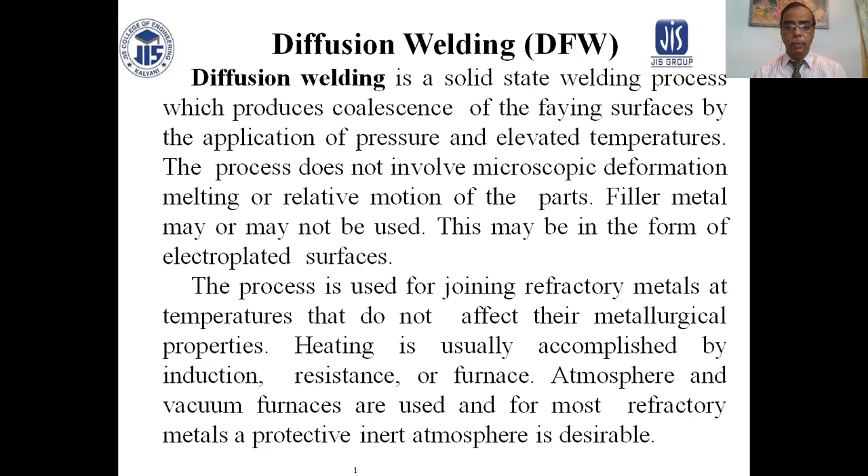Successful welds have been made on refractory metals at temperatures slightly over half the normal melting temperature of the metal. To accomplish this type of joining, extremely close tolerance joint preparation is required, and a vacuum or inert atmosphere is used. The process is used quite extensively for joining dissimilar metals.

The process is considered diffusion brazing when a layer of filler material is placed between the faying surfaces of the parts being joined. These processes are used primarily by the aircraft and aerospace industries.

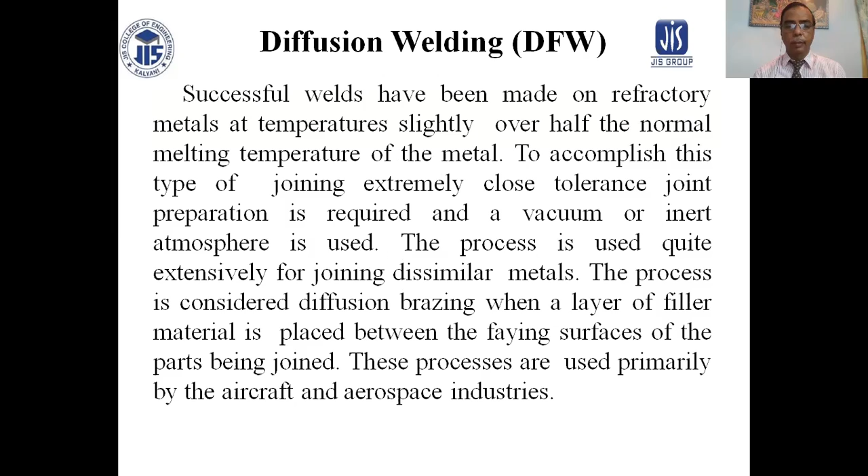Definition, schematic figure, working principles, applications, titanium diffusion welding, nickel diffusion welding, advantages, limitations.

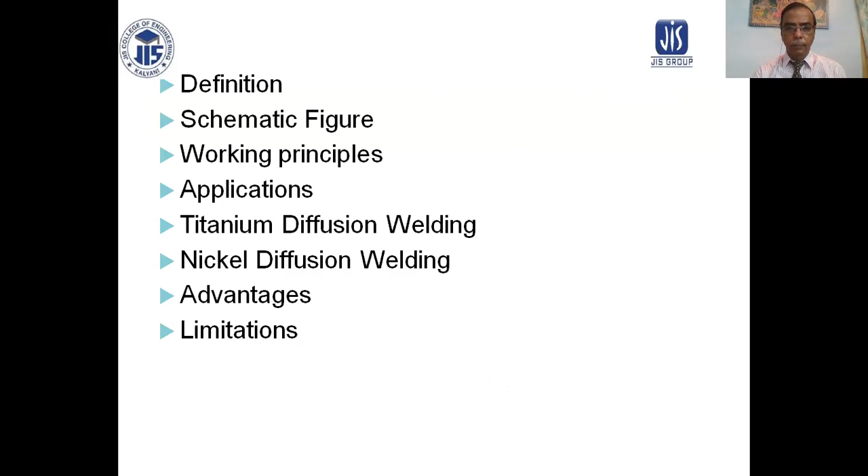Definition of diffusion welding: a solid-state welding process that produces coalescence of the faying surfaces by the application of pressure at elevated temperature. The process does not involve macroscopic deformation or relative motion of the workpiece. The solid filler metal may or may not be inserted between the faying surfaces.

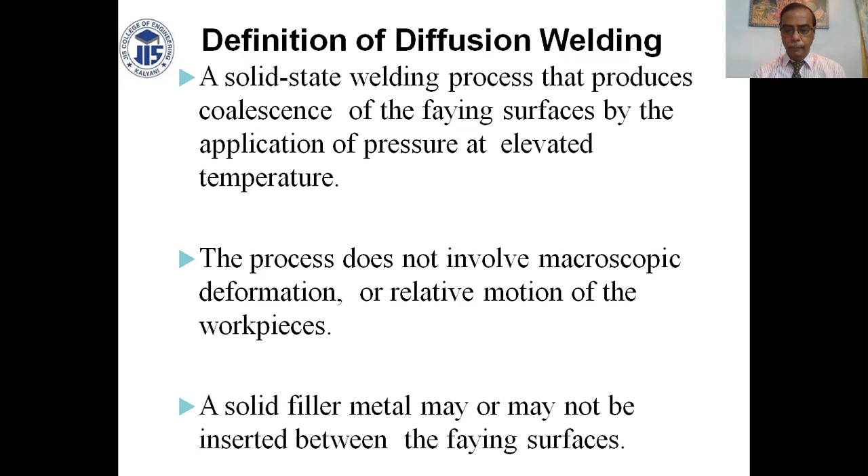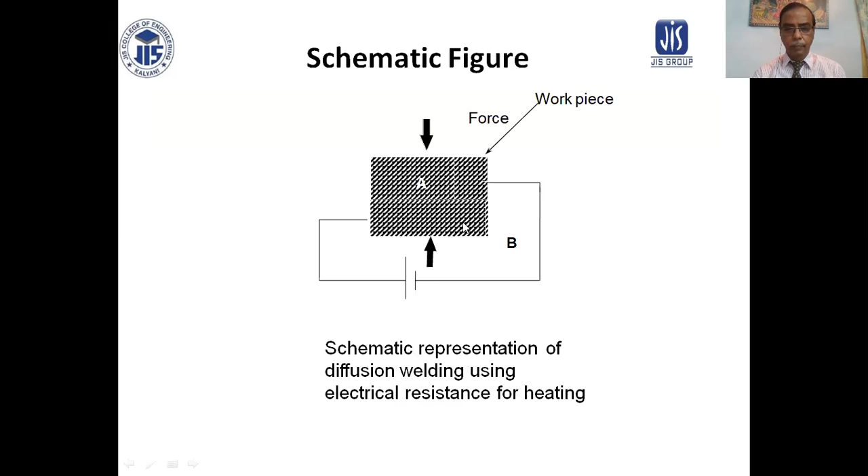Schematic figure. This is workpiece A and workpiece B. Force is applied, and this is the schematic representation of diffusion welding using electrical resistance for heating. Electrical resistance is given so that diffusion takes place between the two metal parts through the heat.

Diffusion welding working principle, stage 1: asperities come into contact. First stage is deformation and interfacial boundary formation.

Stage 2: grain boundary migration and pore elimination. This is the second stage. And stage 3: volume diffusion and pore elimination.

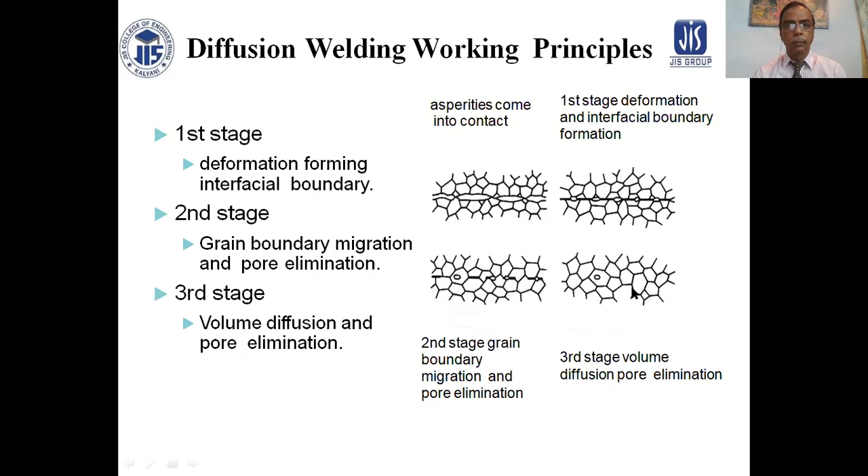Diffusion bonding is a process in which the strength of the joint results primarily from diffusion and plastic deformation of the faying surfaces. Diffusion is the movement of atoms across the interfaces.

Temperatures about 0.5 of the melting temperature absolute. The bonded interface has the same physical and mechanical properties as the base metal.

Strength of bond depends on pressure, temperature, time of contact or duration, and cleanliness of faying surfaces. Bonding may be facilitated by use of a filler metal at the interface. For some materials, brittle intermetallic compounds may form at the interface, which can be prevented by electroplating the surfaces.

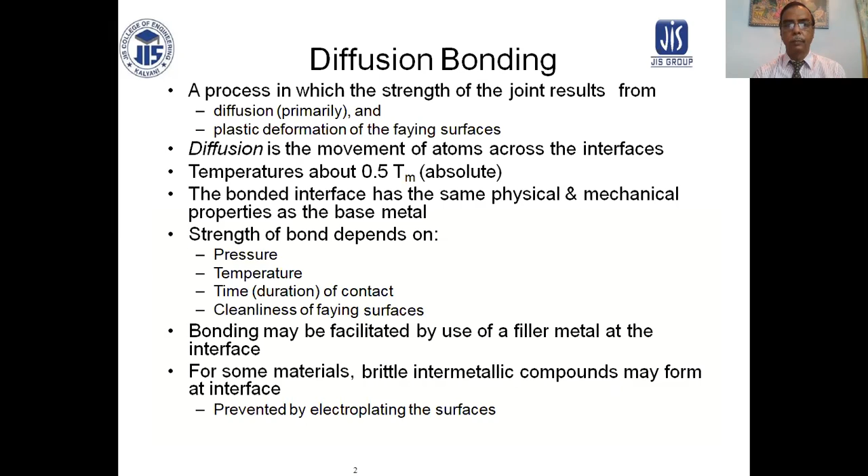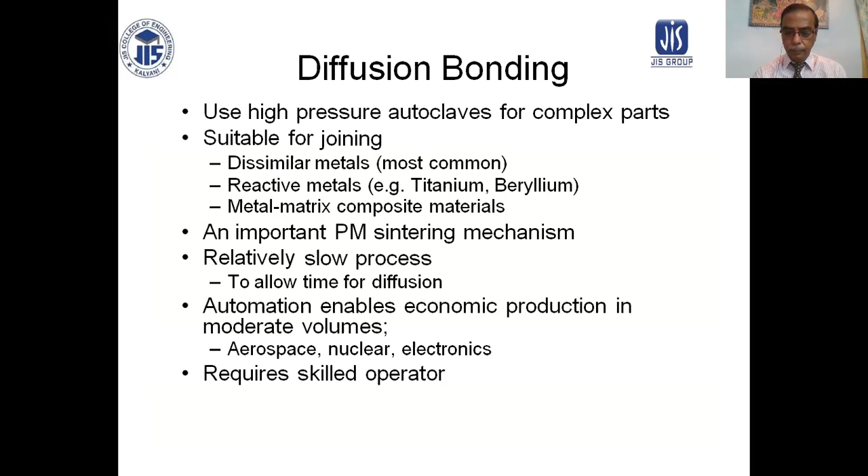Diffusion welding is dependent on temperature, time, and applied pressure. Temperature and time are related to characteristic diffusion distances described in the above equation. Pressure influences diffusion in a more complex way. Compressive stress must be present in diffusion welding, but the required loading might be well below the room temperature yield strength of the material being welded.

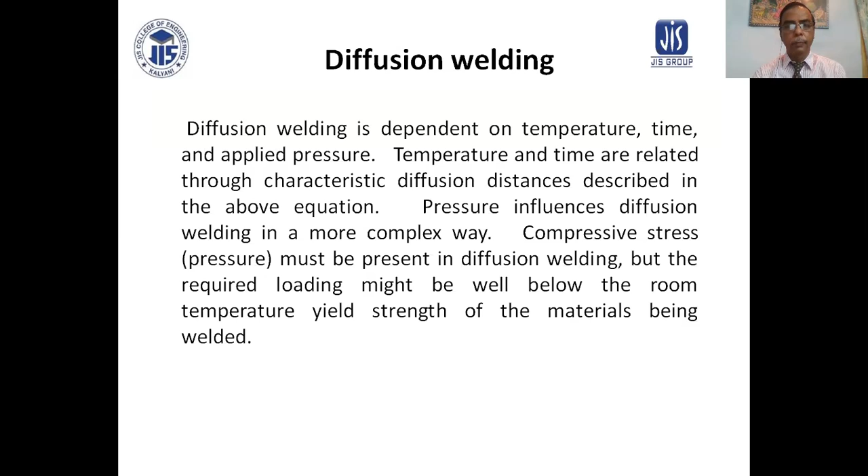Factors influencing diffusion welding: the relation between temperature and diffusion coefficient. D is the diffusion coefficient, and the relation is D equals D0, the diffusion constant, times e to the power minus Q by KT, where Q is the activation energy, K is Boltzmann's constant, and T is absolute temperature. This gives the diffusion coefficient, which is the factor influencing the diffusion value.

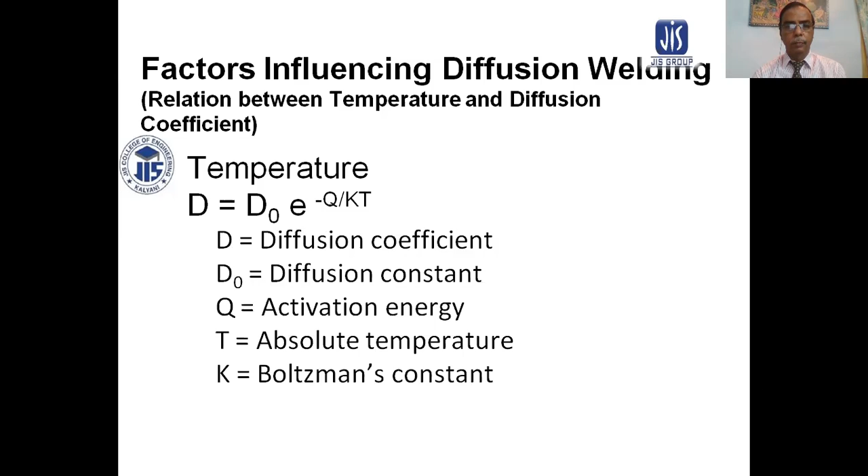Factors influencing diffusion welding: temperature affects the diffusion coefficient and time. X is the diffusion length, C is a constant, and D times T, the diffusion coefficient times time to the power one-half, equals the diffusion length.

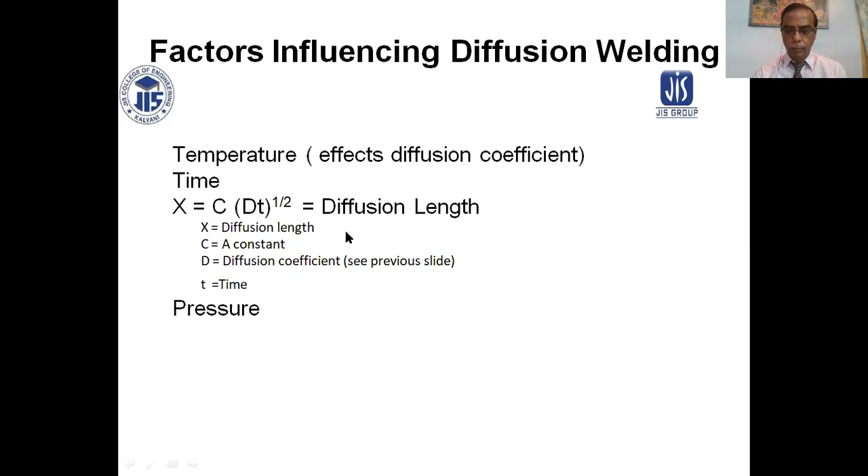Factors influencing diffusion welding. Diffusion welding is accompanied by a certain deformation of parts. This deformation depends mainly on bonding temperature, bonding time, and bearing pressure. Unfortunately, influences of temperature and bearing pressure are non-linear, making it difficult to predict the deformation of a new design.

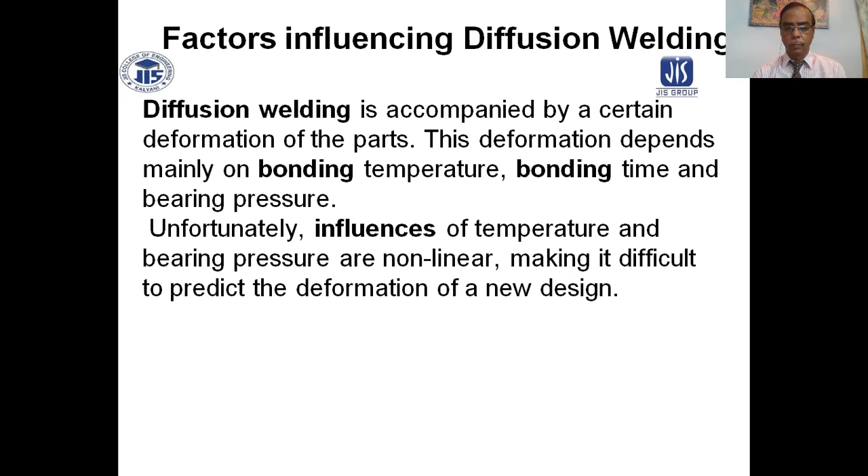This is the original interface position. This is the contact point. Concentration of B. This is B parts and this is A parts. Concentration of component of A, 0% B parts to 100%, and this is 0% component of A to 100%. This is the original interface position. Interface position.

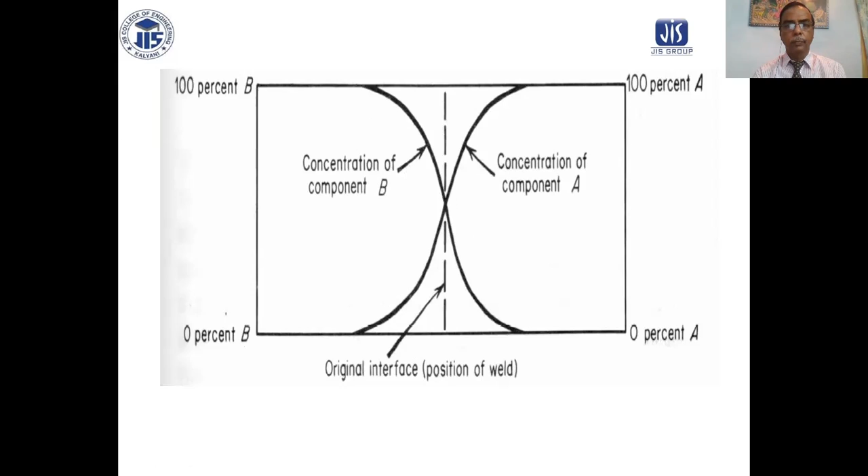So how the bonding takes place. This is another figure. This is metal B and metal A. This is where something is inserted. This is pure metal B and pure metal A. This is where the interface of the weld is. This is A figure and this is B figure.

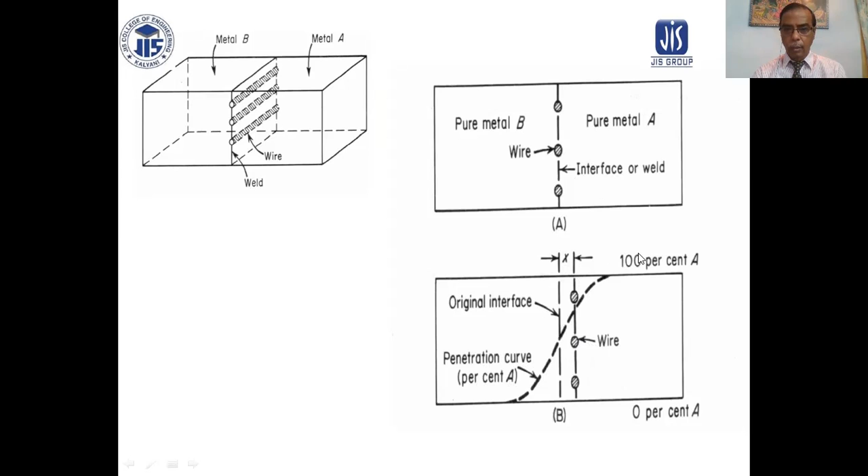The penetration curve, how the penetration curve is for A. Original interface. This is the original interface and this is X. Interface changes, 0 to 100% A. Another figure will show you how the interface changes.

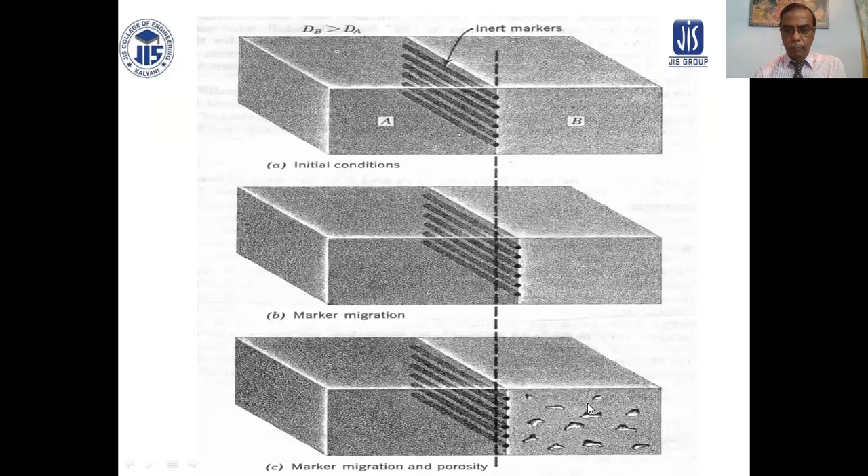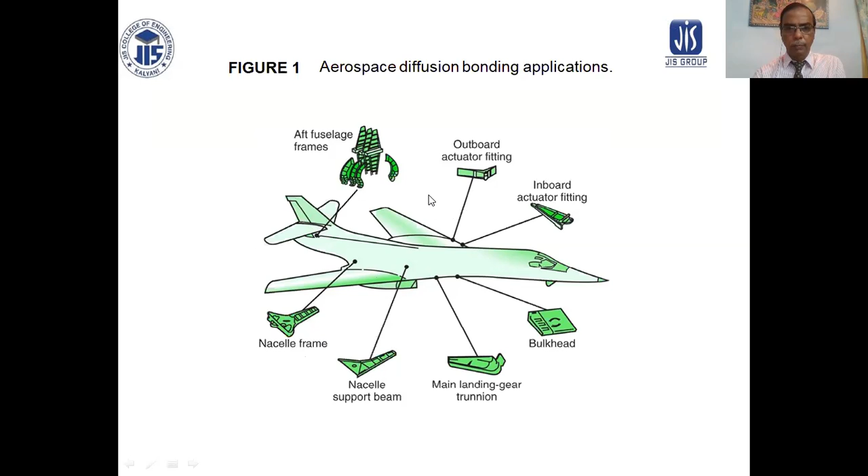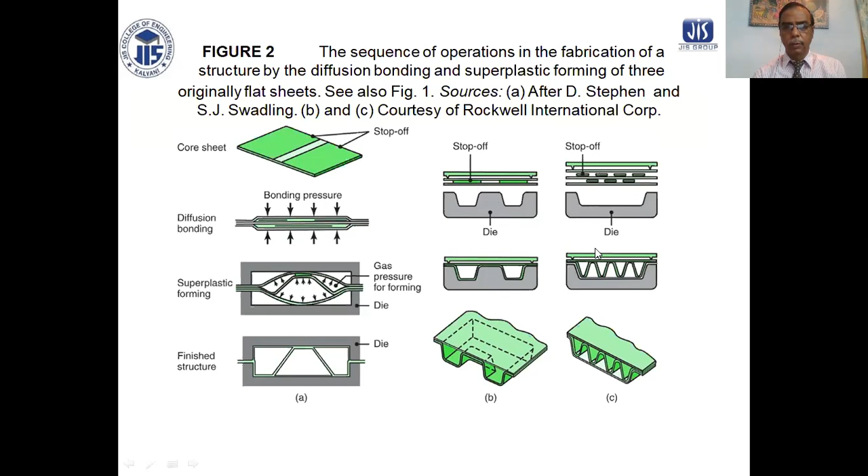Application of diffusion welding. Application in titanium welding for aerospace vehicles. Diffusion welding of nickel alloys includes Inconel 600, wrought Udimet 700, and René 41. Dissimilar metal diffusion welding applications include copper to titanium, copper to aluminum, copper to columbium 1% zirconium. Brittle intermetallic compound formation must be controlled in these applications.

Titanium diffusion welding: temperature as high as possible without damage to base metal, 75 to 100 degrees Fahrenheit below the alpha-beta transus, that is 1700 Fahrenheit, around 927 degrees centigrade. Time varies with other factors, but 1 hour to 4 hours is typically required. Pressure near yield at temperature. Smooth mating surfaces; rough surfaces usually need more time or pressure. Clean surface, usually acid cleaning.

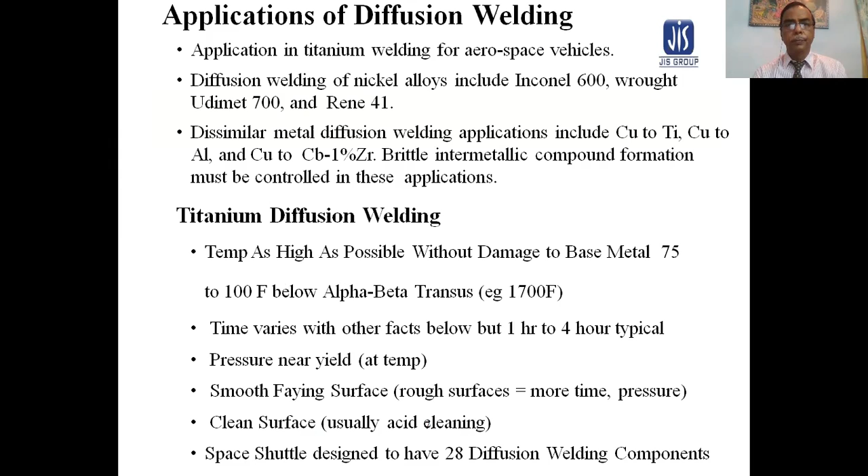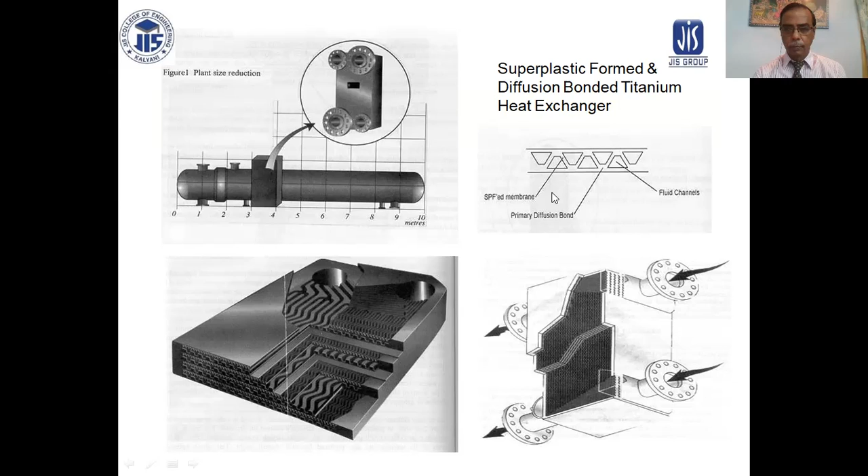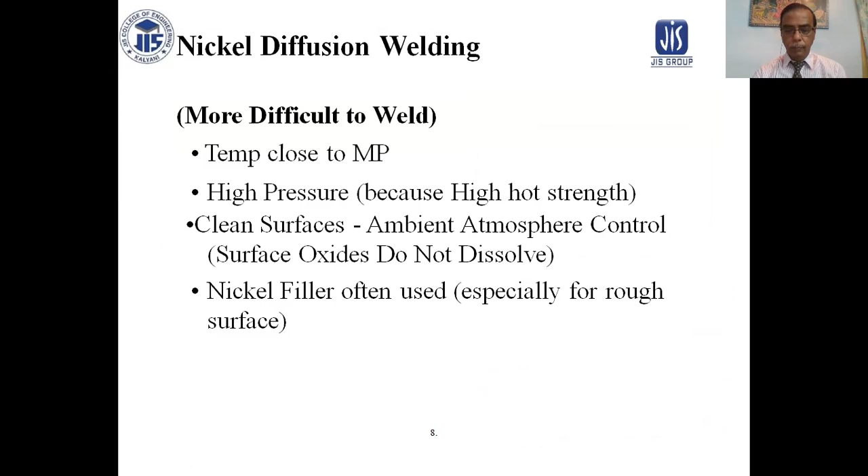Nickel diffusion welding: more difficult to weld, temperature close to melting point, high pressure because of high hot strength, clean surface, atmosphere control, surface oxides do not dissolve. Nickel filler often used, especially for rough surfaces. Typical diffusion welding conditions for some nickel-based alloys.

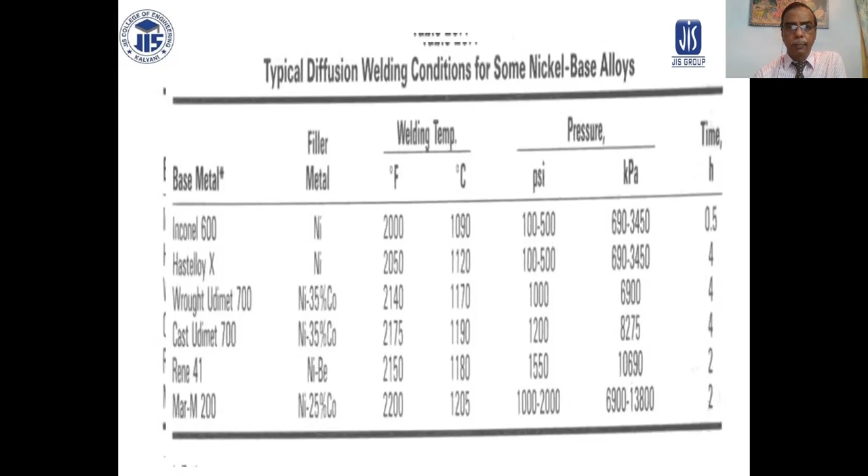Diffusion welding of dissimilar metals. An intermetallic phase or a brittle intermetallic compound may form at the weld interface. Selection of an appropriate filler metal can usually prevent such problems. Joint designs can help also. Low melting phases may form. Sometimes this effect is beneficial.

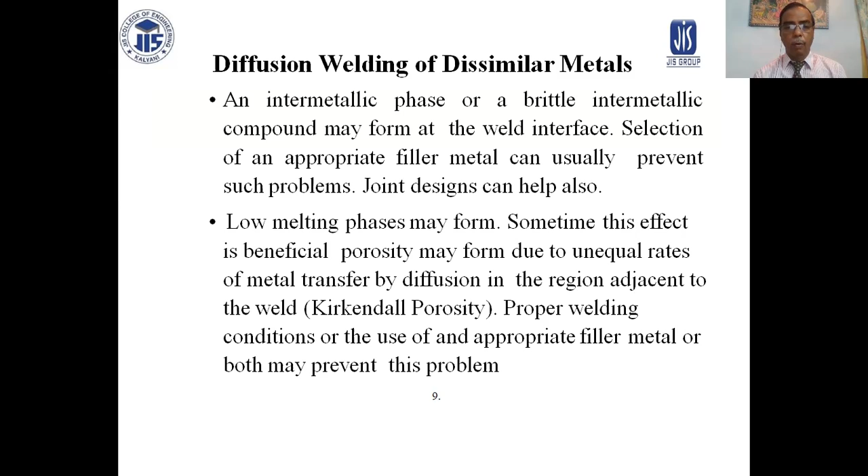Porosity may form due to unequal rates of metal transfer by diffusion in the region adjacent to the weld. Regarding porosity, proper welding conditions, or the use of an appropriate filler metal, or both may prevent this problem.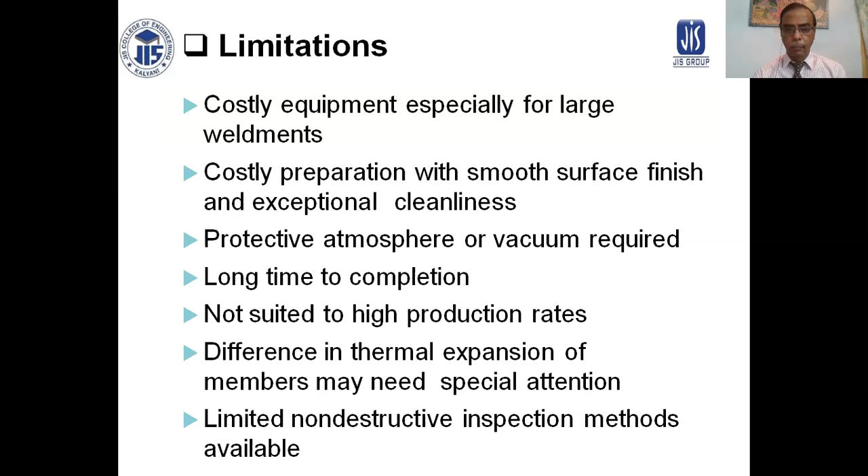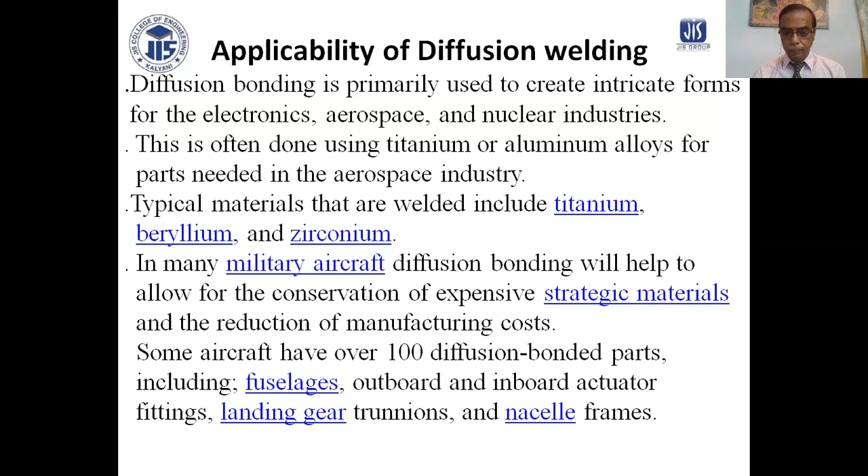Some aircraft have over 100 diffusion bonded parts, including fuselages, outboard and inboard actuator fittings, landing gear trunnions, and nacelle frames. Application of diffusion welding in titanium welding for aerospace vehicles. Diffusion welding of nickel alloys includes Inconel 600, Udimet 700, and Rene 41. Space shuttle designed to have 28 diffusion welded components.

Dissimilar metal diffusion welding applications include copper to titanium, copper to aluminum, and copper to columbium 1% zirconium. Brittle intermetallic compound formation must be controlled in these applications.

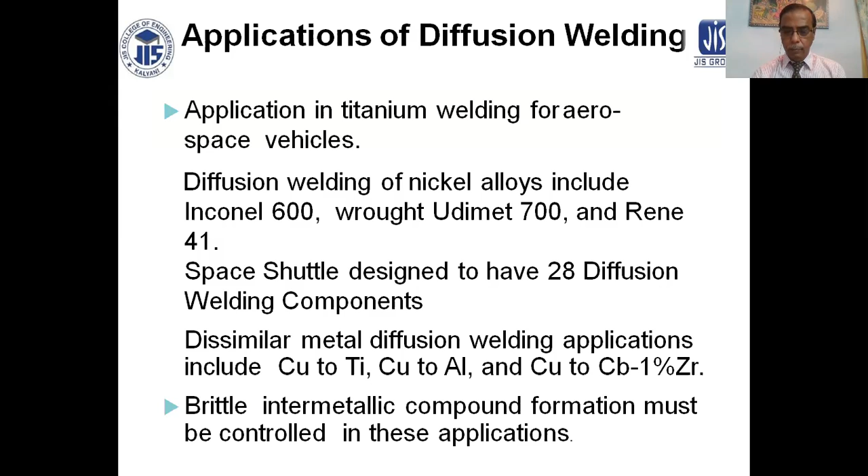Questions. Number one, diffusion into the metal components to be joined is required in: solid state welding, plasma arc welding, electron beam welding, laser welding. Answer is solid state welding. Number two, welding process in which electrical arc, resistance to flow of electricity or combustion of gases is not required to produce heat: cold welding, solid state welding, diffusion welding, and thermite welding. The answer is diffusion welding.